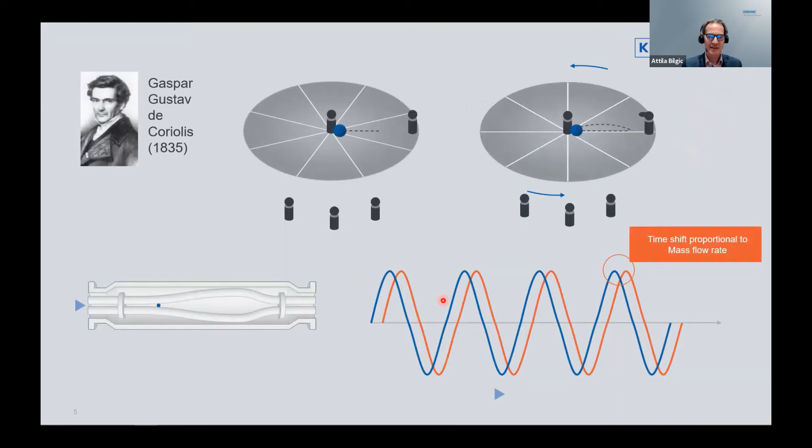Let's look at the Coriolis mass flow meter. It provides very accurate measurements of mass flow and also density, and it can do so quite precisely. It's been known for decades. What we extended is that we made it able to measure entrained gas and compensate for its effect from 0 up to 100%, and that's been since 2012.

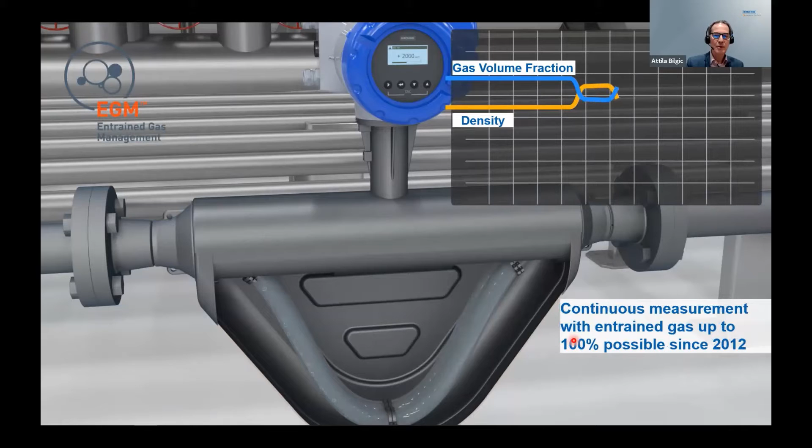So this is the primary data you see when you look at the sensor. But there is a lot more behind it, and you will see it when you look inside. Once again, when you look at the process quantities, you see flow, density, and temperature. But what is actually measured inside the device is a Coriolis time shift, a resonance frequency, and a PT500 resistance. And from those three quantities, you can calculate many other quantities like mass flow, volume flow, density and concentration, or even concentration flow, and of course temperature.

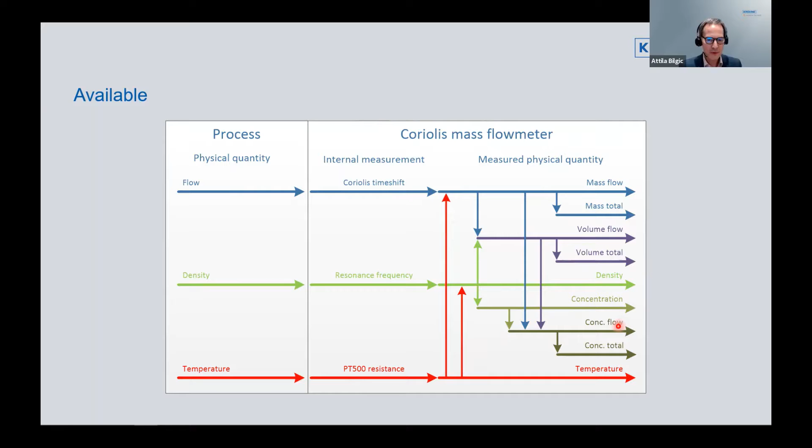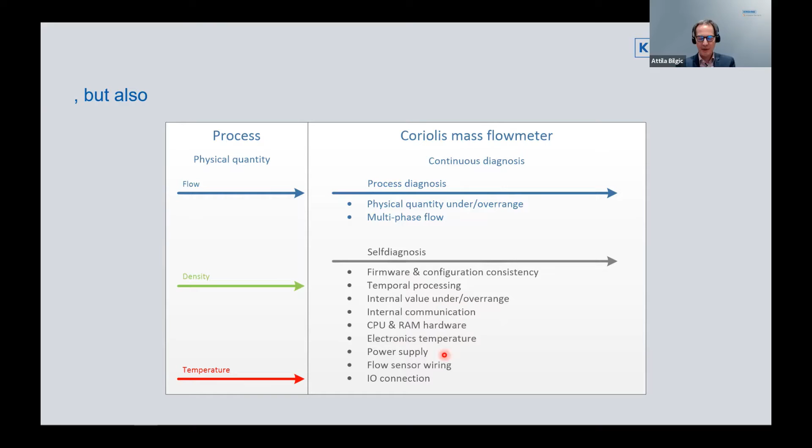Additionally, there is more information in the device. There is process diagnosis available, like physical quantity under or over range, or even multi-phase flow information. And of course, in the electronics, there is a lot of self-diagnosis available, like for temporal processing, internal value under and over range, internal communication, CPU and RAM tests, electronic temperature, and so on. So there is a lot of data, and actually there is a lot of information already available today.

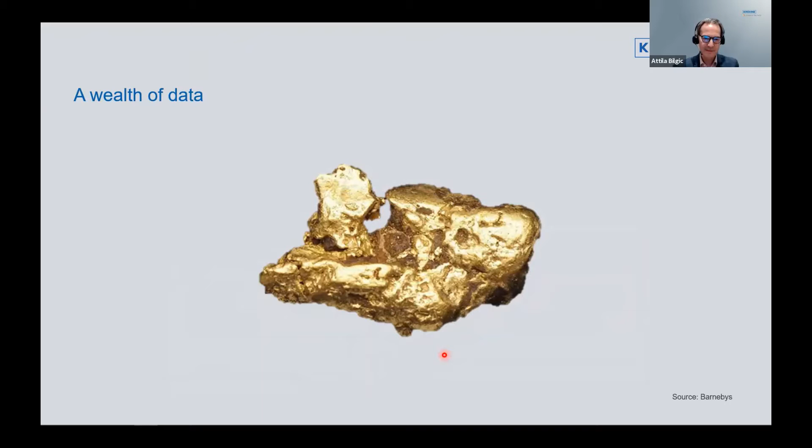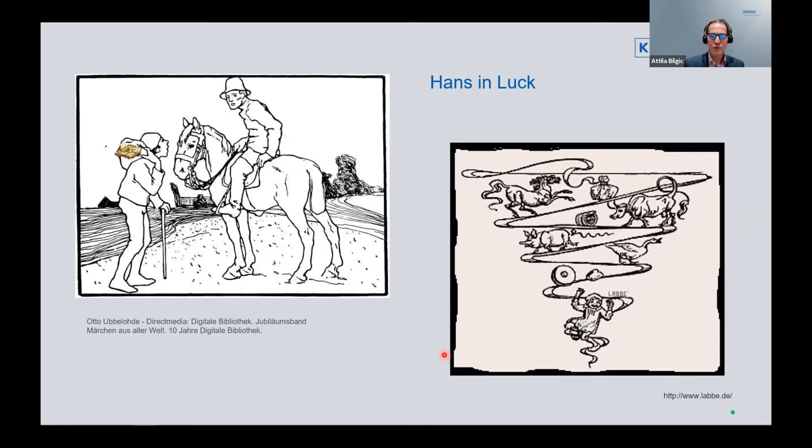Let's look at the next step in our eightfold path. We have a lot of data, but we need right preservation, meaning do not convert your data away. I'll show you this in an illustration from a German fairy tale, Hans in Luck, which you may know. Hans in Luck got a lump of gold, and whenever he meets someone, he exchanges it for something else. Then that something else is again exchanged, and so on, until the value of his lump of gold becomes less and less until he ends up with zero. Sounds like a fairy tale, but that's pretty much what we do today in our installations in the process industry.

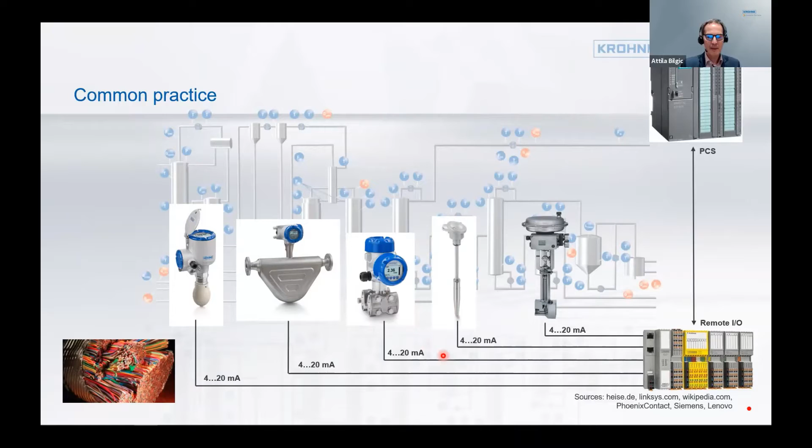Let's look at why. What is common practice today is that we have a lot of equipment already in the field: sensors, measurement technology, actuators. We connect them via a 4 to 20 milliampere loop through a remote I/O with a control system.

Let's more specifically look at a little part of a big plant. Let's look at a control loop. For a control loop, we need a valve to control the flow, and we need a flow meter to measure the flow. The flow meter is indicating the flow, giving the information to the PCS, and then the PCS in turn is controlling the valve to open up more or close more the flow.

Theoretically, it's quite easy, but what's actually happening is the following.

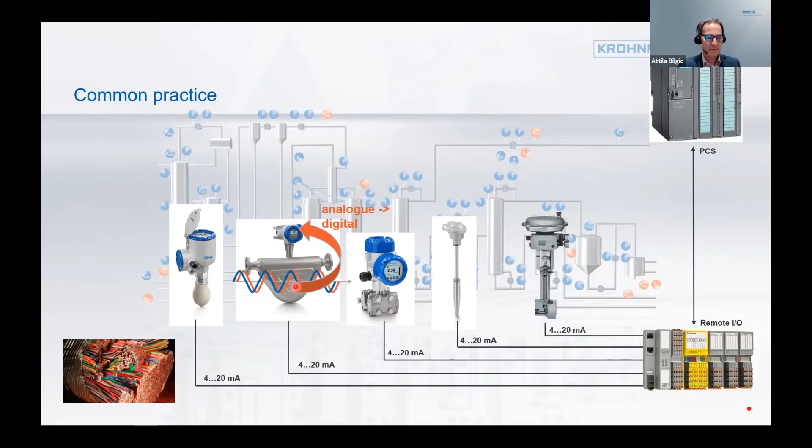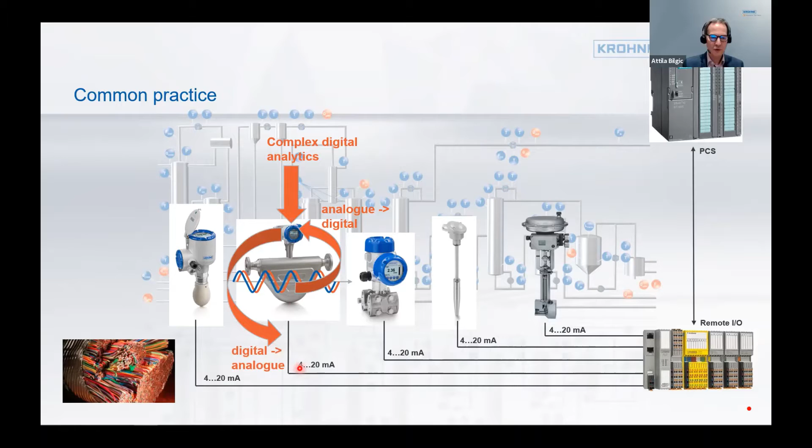In the flow meter, we do an analog to digital conversion from the actual flow primary measurement in the electronics. There we do a lot of complex digital analytics. We'll come to that later. Then we do conversion from digital to analog to transfer the flow measurement value via a 4 to 20 milliamp power loop to the remote I/O.

And this is going through hot and cold areas. You can imagine it has to work somewhere in the North Pole as well as somewhere in the desert.

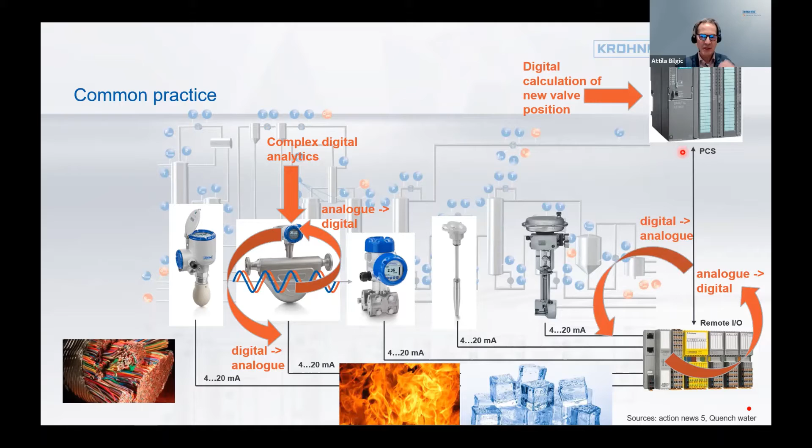Typically in the remote I/O, we do an analog to digital conversion again, and then we transfer the signal to the PCS. There, some digital calculation is done of a new valve position in our example. Then it is again converted from a digital signal to an analog signal, transferred back via a power loop. And then in the valve electronics, the analog signal is again digitalized and used for some digital processing. A new adjustment value for the valve positioner is calculated, converted into an analog signal, and transferred to the positioner. That's quite a lot of conversions.

But I have another example to show it more in a simplified way.

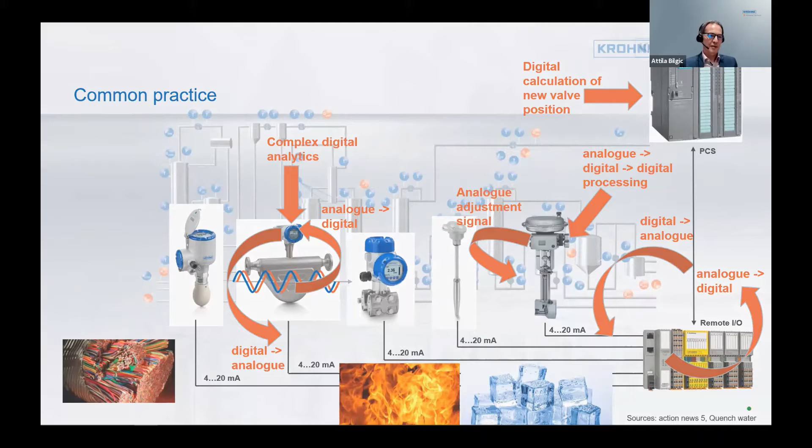If you're a hobby photographer and you have a digital camera and you want to send one of your pictures to your friends or family, this example will show how you usually should not do it. You take the picture with your digital camera, you print it on your printer, take the print, move on to your scanner, put it in the scanner, digitalize it again, scan it, bring it to your PC, and then send it via email. I think that really sounds weird, and probably none of us would ever do it that way, but that's, in a simplified way, what we actually still do in the process industry.

And I think there's really room for improvement.

Another example to illustrate what we actually do versus the possibilities we have, or how we underuse it, was presented by Dr. Brucker in one of the NAMUR general meetings, I think in 2014. He made a very nice presentation on the accuracy of flow meters and the reality check. I don't want to repeat everything, but I just want to focus on the main aspects.

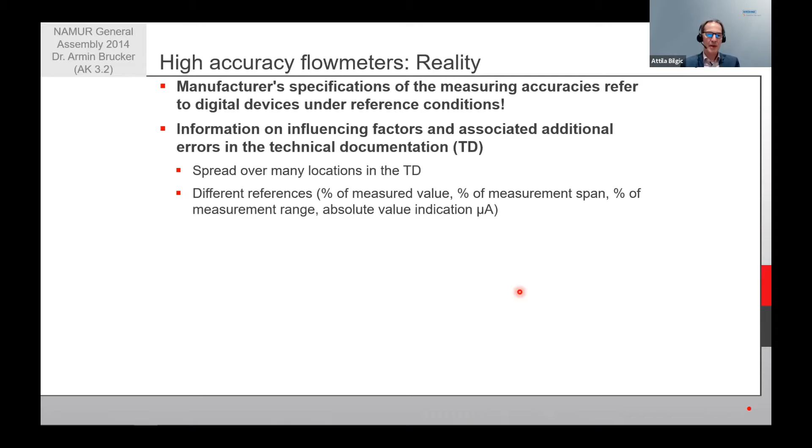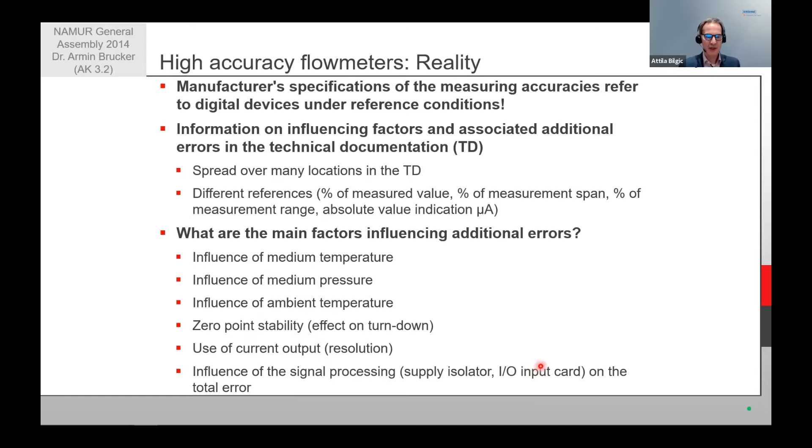We as manufacturers specify measuring accuracies under certain conditions, and this information is spread in the technical documentation. But what are the main factors influencing the additional errors? This is actually the influence of medium temperature, medium pressure, ambient temperature, the zero-point stability, the use of the current output, and the influence of signal processing, the supply, isolator, I/O input cards, and so on.

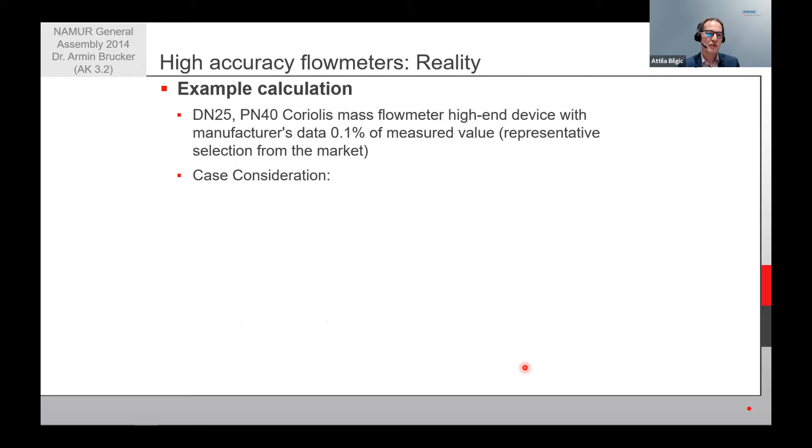He looked at two simple examples. He took a Coriolis mass flow meter, a typical high-end device, specified at 0.1% accuracy. We consider two cases. Case one is under normal medium pressure and at 50% of the measurement range, a turn down ratio of 1 to 2, so we use the scale quite nicely. The other example is with 10% of measurement range, a turn down ratio of 1 to 10, meaning we're going quite to the beginning of the measurement range.

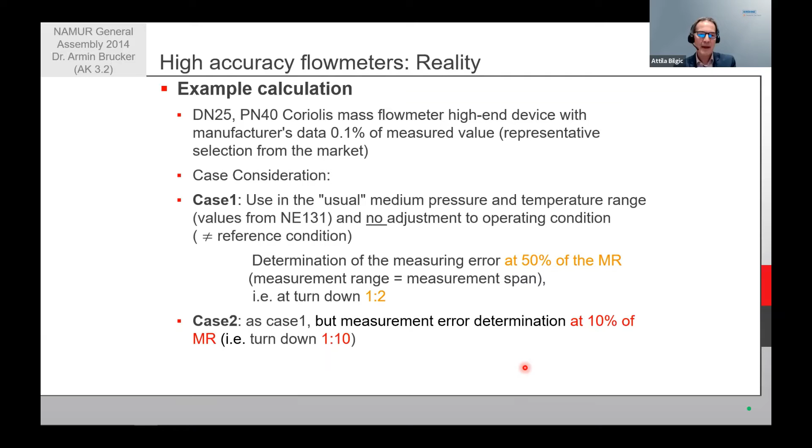Let's only look at the error contribution in such a case. This is the actual sensor error under these boundary conditions, and we see the major impact on sensor error is the ambient temperature, dominating all the other errors. But next to the actual sensor error, there is an error contribution from power supply, and another significant error contribution from the analog input to the PCS. So the total error in that case would amount to 0.55%. Remember, the specified accuracy was 0.1%.

When you look at the second case, turn down ratio 1 to 10, again going to the lower end of the measurement range, you see that the ambient temperature contributes even more to the sensor error, amounting to almost 2%. The power supply and also analog input give major contributions to a total error bigger than 2.5%.

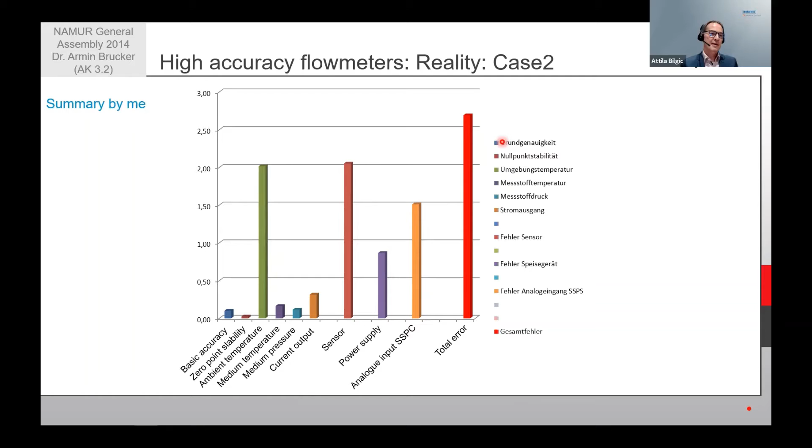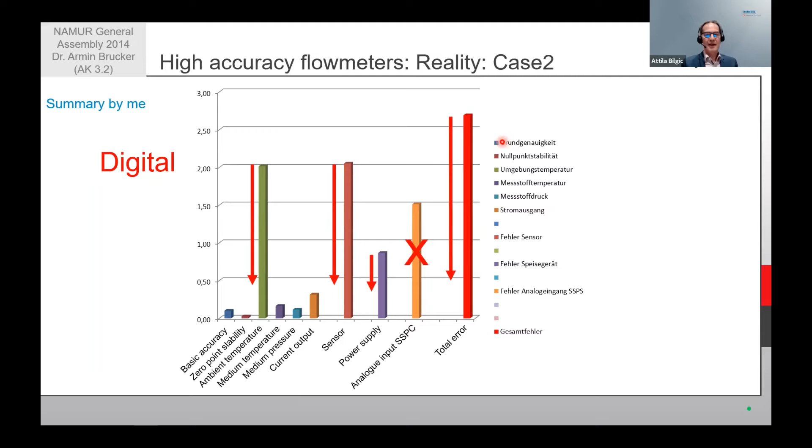The next point is looking to the right connection, and for that we have to use suitable technologies.

Some of us might remember the good old times of the telephone system. When you wanted to call someone, especially overseas, there was an operator sitting somewhere physically connecting the caller and the receiver, establishing a physical connection between two parties. A physical connection doesn't have to be a wire, it can also be a radio transmission, but the important point is it's a one-to-one connection. That's why this is called circuit switched communication. It was quite stable and reliable once set up, but also very inflexible, relying on a stable connection, wired or wireless, between the two parties.

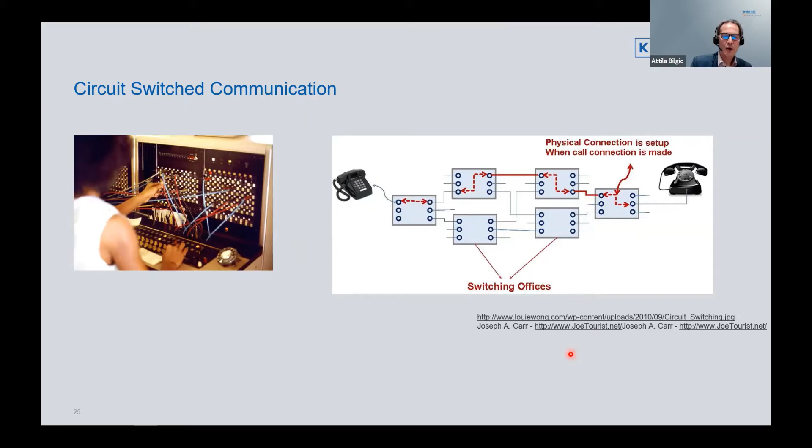That's definitely not what we do nowadays, and it's not how computer networks work. Computer networks actually work in a packet switched communication setup, where a sender sends packages. Packages can be routed through different ways and will be recombined at the recipient again. Such a communication network is much more reliable, has redundancy, and has much higher flexibility. That's a typical setup for modern computer networks, whether it's the internet itself or a subnet.

Let's look at what we do today in the process industry. Again, this is the setup we've already discussed. We connect all our equipment through an analog 4 to 20 milliamp current loop to a remote I/O and then finally to a control system.

But revolutionarily, we were able to modulate a digital signal on this, and this is what we call HART communication. Besides its low speed, HART communication is actually exactly the setup I've shown before. It's a circuit switched communication with all the advantages and disadvantages such a system brings: point-to-point connectivity, no connectivity between assets, and a static communication setup.

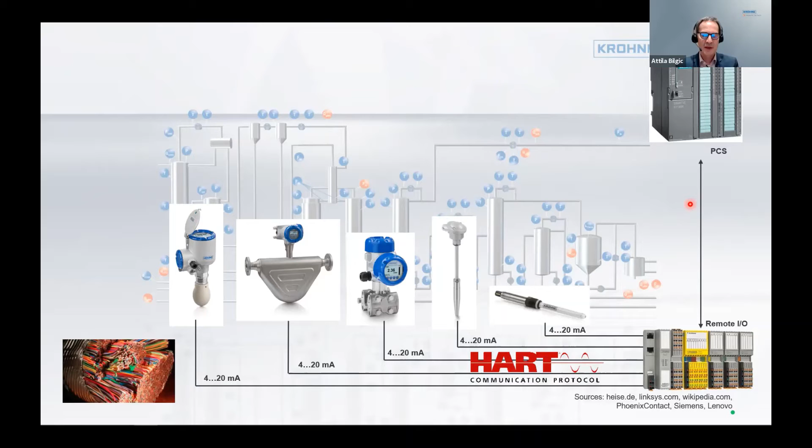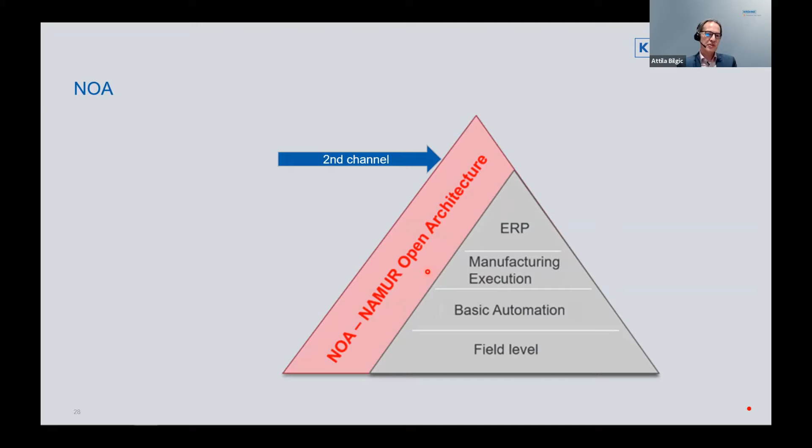So looking at that, NAMUR came up with the idea to extend that system, and that's what they called NOA, the NAMUR Open Architecture, which provides a second communication channel. Why that? Because this old-fashioned, established, but robust communication architecture of the past should still persist and be carried on into the future to keep all the advantages it brings. But with a second channel, we open up a completely new communication world with all the possibilities it brings, though we have to do it in a safe and secure manner.

Now there are two ways to build such a second channel. One way is a kind of physical separation of your communication channels, the first and the second channel, and the other is a logical separation, meaning the same physical channel but separated by content on the logical level. I will give you an example of what that means for us in the process industry.

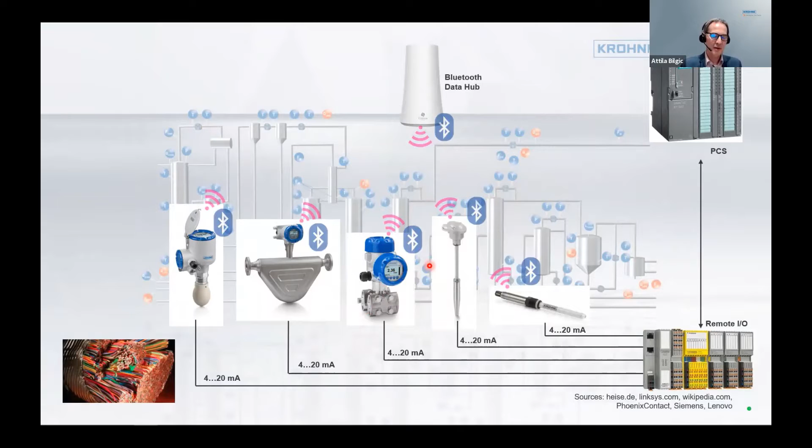A simple way to extend the architecture we've seen with a physical second channel is, for example, Bluetooth. Bluetooth is just an example of wireless technology, it could also be wireless LAN or another technology. The advantage is that you can use the existing infrastructure and add wireless connectivity, needing hubs to collect the information. As you can clearly see, there is no physical connection between a control system, which still runs in the old-fashioned way, and the new world of big data and open communication, where you can enhance a lot of features that are completely impossible in our closed world. That's an easy one, theoretically.

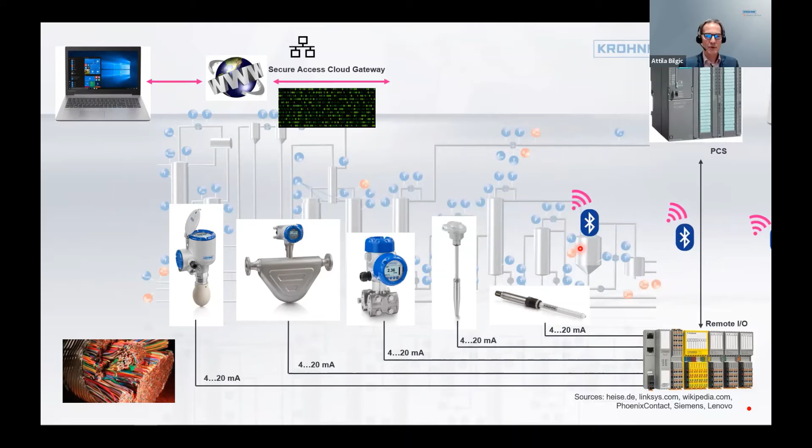Another approach is the logical separation. We remove the Bluetooth connectivity again and connect our equipment with Ethernet. In that way, all the equipment in the field can go through a splitter, which decides what is critical for the control functionality. That information goes to the PCS, and all the other additional information and data we already have in the field goes to a cloud or on-premise solution. We'll come to that a little bit later.

After looking at the right connection, you also need to look at the right protection, because it's nice to extend our world with all the open features, with all the big data approaches and artificial intelligence approaches which are already in the world, but definitely we do not want to sacrifice operation safety. That's a must-have.

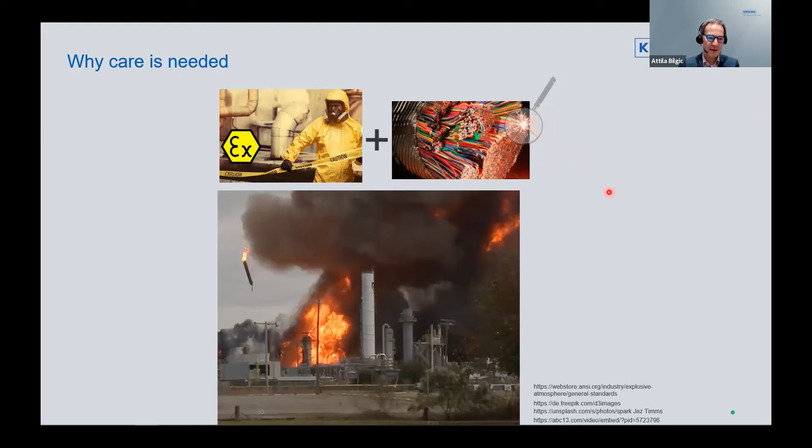As you all are aware, we have Ex zones, explosion protection zones. When we put in a lot of cabling, especially with high energy, and something nasty happens, it results in unnice pictures, unnice situations that we all want to avoid. So the nice connectivity with Ethernet, which brings a lot of possibilities to the field, also has to be suitable to work in an explosion protected area.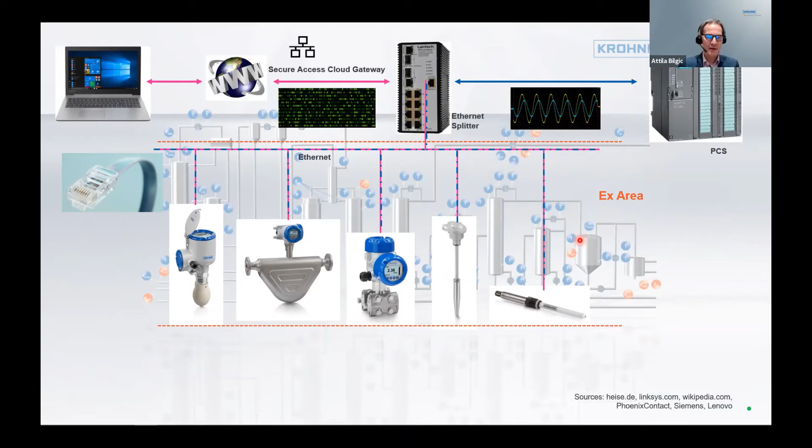To do so, we have to limit the energy we use for the signal transmission in the Ethernet network. That's easy said, but quite difficult to be done, because we need energy for digital signal transmission.

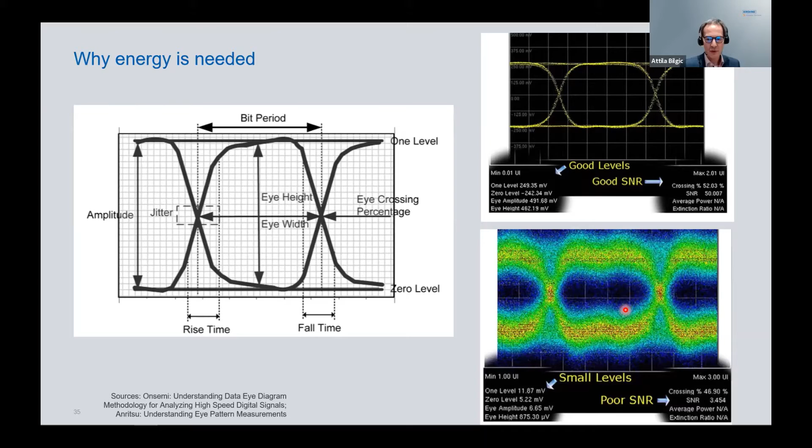This increases significantly the so-called bit error rate, and makes digital signal transmission difficult or close to impossible. Because on the other side, you have to consider that you have to bridge large distances. You need long cables, because our plants are not just fitting on a table.

And that's why an industry consortium thought about how to extend this Ethernet standard. They came up with the so-called Advanced Physical Layer, APL. The mission is to find an extension to the Ethernet standard 802.3 CG, which is fully compatible for all the higher layers, just changing something little in the physical layer. We'll come to that overview on the next slide.

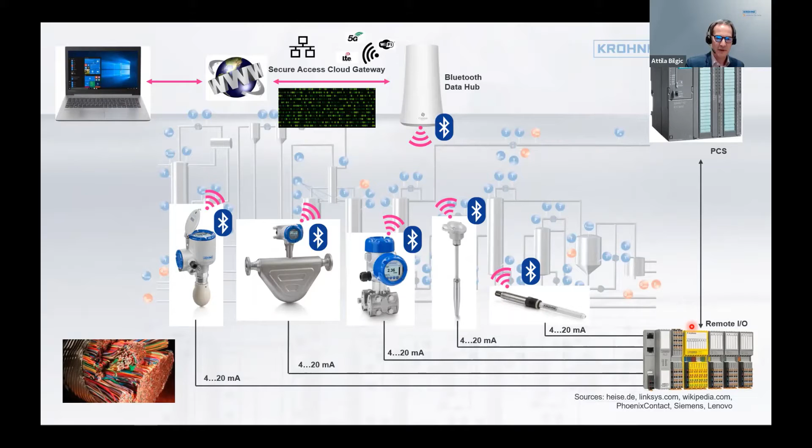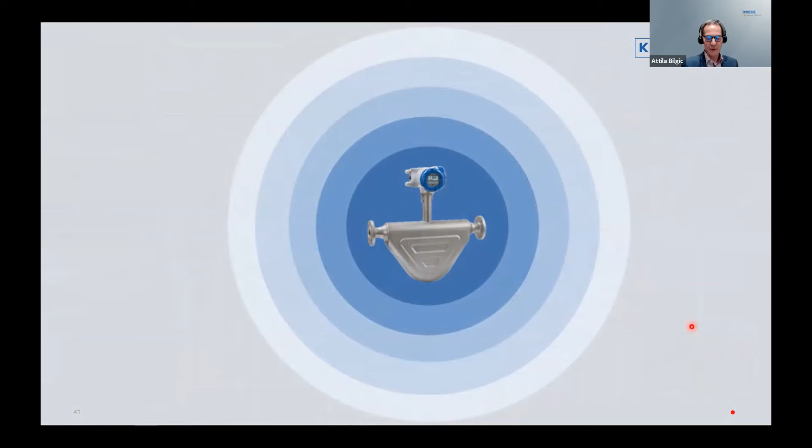Coming back to the two ways, physical and logical separation, for the second channel to implement the NOA architecture, there is another aspect: security and safety, especially when it comes to wireless connectivity. That's why we thought about a structure and architecture for how to make a SIL-compliant Coriolis mass flow meter suitable for communication with Bluetooth connectivity. One aspect is you have to take care for safety, and at the same time you have to take care for security. They sound similar, but they are quite different.

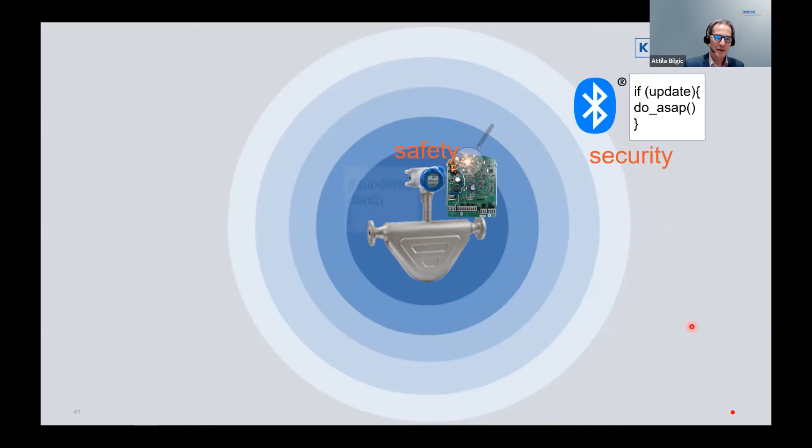There is a simple example. For security, you would immediately want to do an update as soon as one is available. That's what you know from your mobile phones, tablets, and laptops, where the system asks you to immediately install an update, if you didn't already allow it to do so automatically. But this is quite the opposite for safety. Your safety core system shouldn't be updated. So if an update were available, you should step back and say, hold on a moment, I'm not going to change my certified software in my safety system. So how to manage that is quite a challenging task.

The only way we came up with to solve it is this ring structure, or shell structure, with different security layers. The outer layer is an insecure area with no trust and no authentication — here you connect mobile devices. Then you have the outer secure area with partial trust, and the inner secure area, which is the safety redundant area, under full trust. In between there is a firewall, and we even built in a hardware switch. This hardware switch can completely shut off any wireless communication, or bring the system to read-only mode, or even to read and write mode. With that, we were able to get a certified security and safety compliant system for the process industry.

So after we protected our system correctly, we have to think about the context into which we put our data and information, to finally make information knowledge for the people in the field. And to do so, we have to prepare what our experts need.

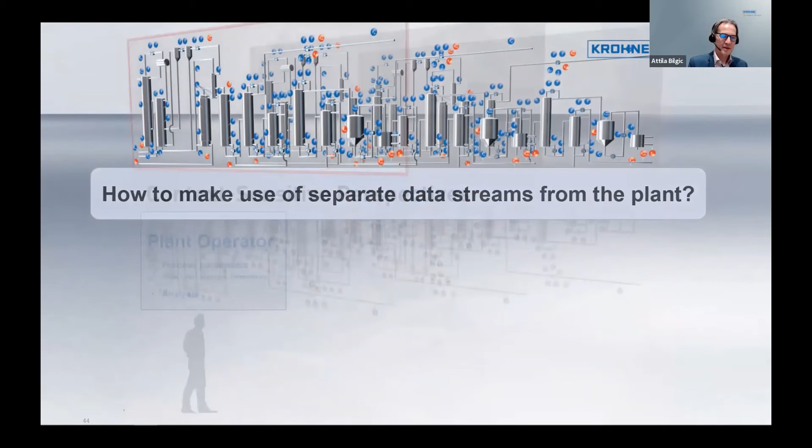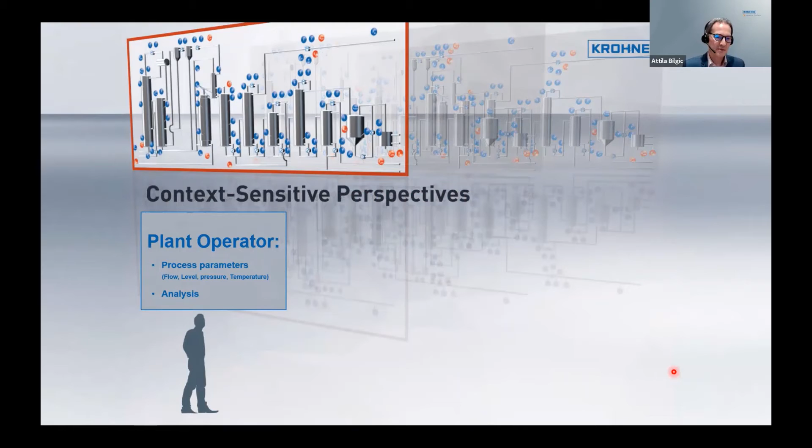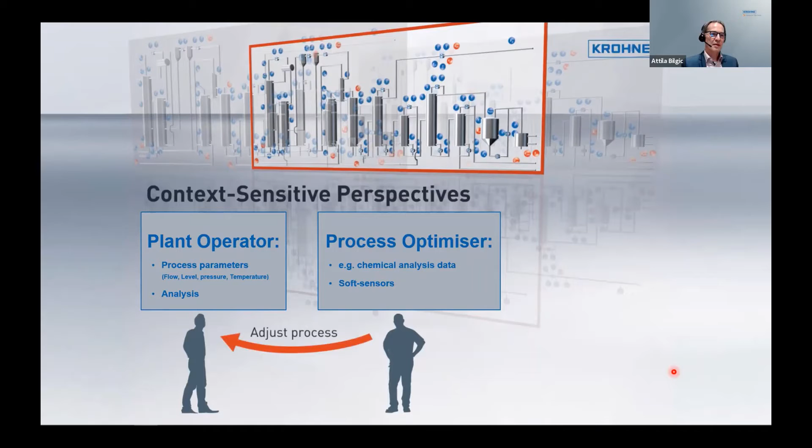Let me start with a simple example that shows, in a very simple and superficial way, how to make use of separate data streams from plants. A plant operator still wants primary measurement values — what we call flow, level, temperature, pressure, and chemical analytics. A process optimizer might look at different data, like chemical analysis or information from soft sensors. And the asset manager might look at device or plant diagnostic data, to also give feedback to the plant operator in terms of predictive maintenance information.

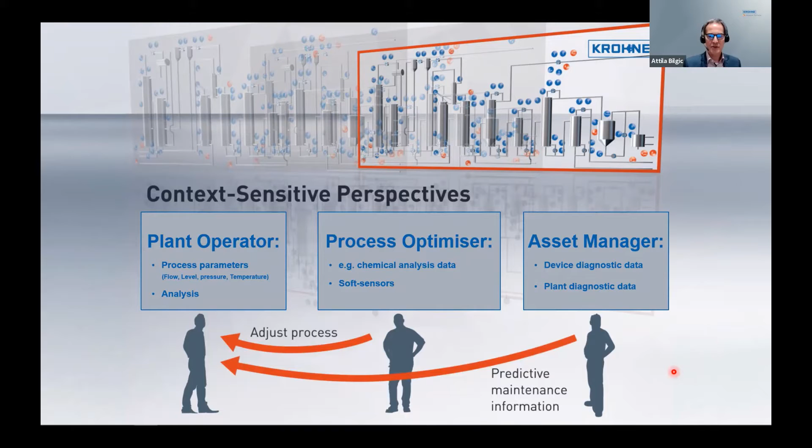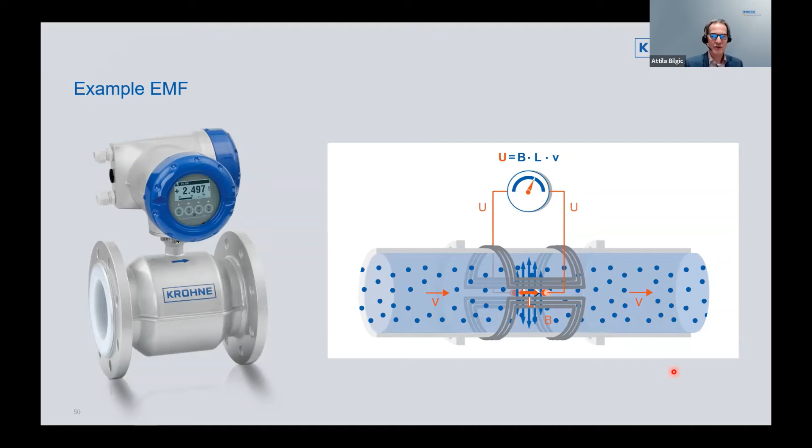Sounds quite simple, but it's not that easy to realize in practice. Again, I want to look at a simple example from a flow meter — the electromagnetic flow meter. We don't have to go into detail on how it works, but I will quickly illustrate it. The context of the plant operator is: how can I get reliable process control data? He wants a stable, reliable flow value from this instrument in the field.

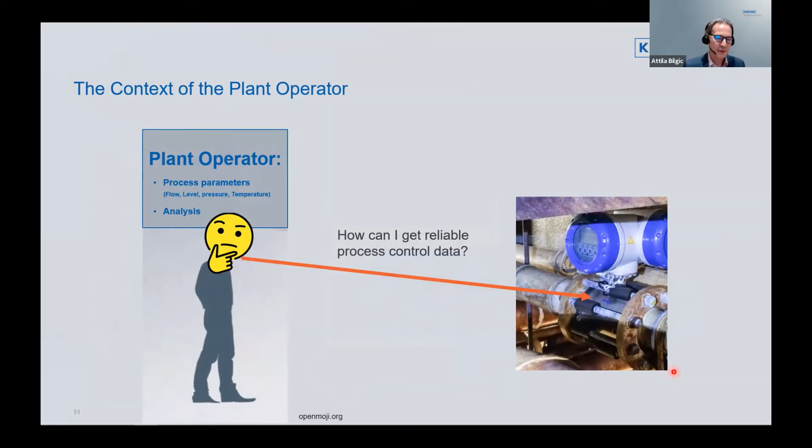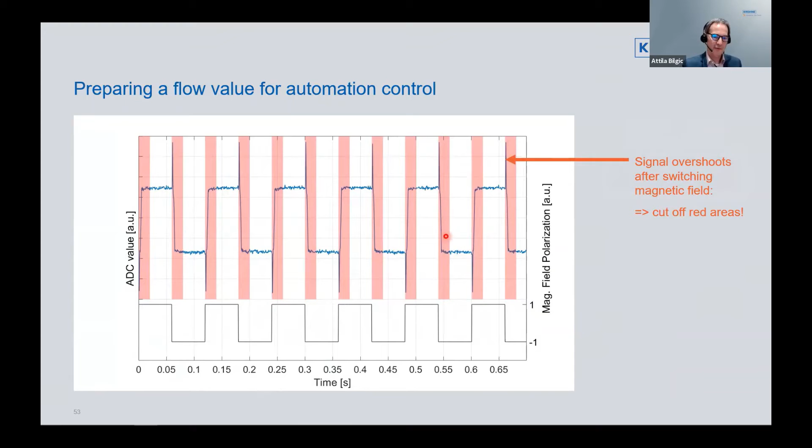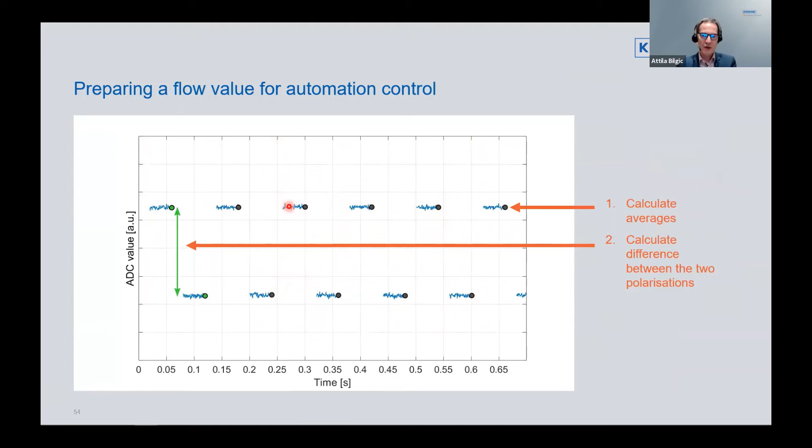To do so, we at KROHNE, as well as other competitors in the market, put quite some effort into the device to stabilize the signal. This, for example, would be a typical signal at the electrodes of the equipment, or at the ADC of the electronics, in a typical flow situation. We switch the magnetic field periodically to cancel out asymmetries, and we have signal overshoots due to the switching magnetic field, which we have to eliminate. Then we end up with more or less stabilized signals, leading to a stabilized flow signal, which again goes through a filter. Here we've taken a finite impulse response filter, a FIR filter, which flattens out the signal variations over time and leads to a stabilized flow signal.

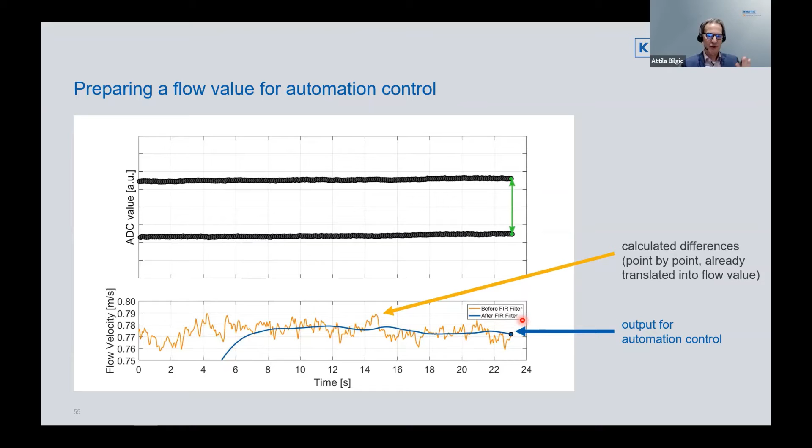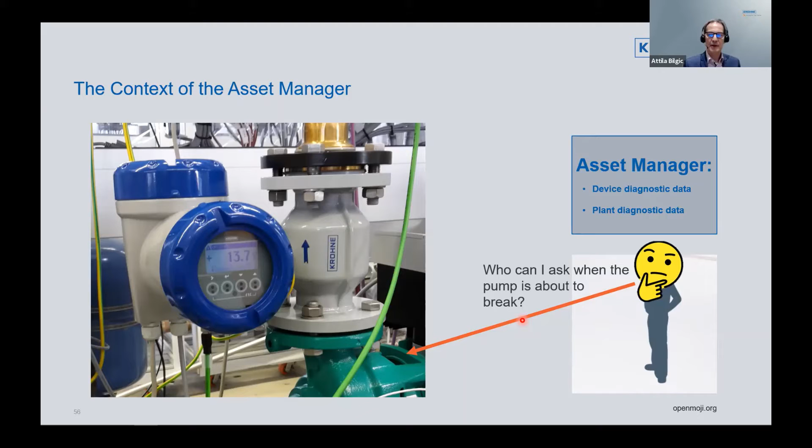So we're happy we got a stabilized flow signal. So far so good. The asset manager might now ask a different question — who can I ask when the pump is about to break? For sure, you can take diagnostic information directly from a smart pump, but eventually your purchase department made savings on the budget, so you're not allowed to buy a smart pump and you have a simple unregulated pump instead. But your flow meter can still tell you something about the pump. You just do something different.

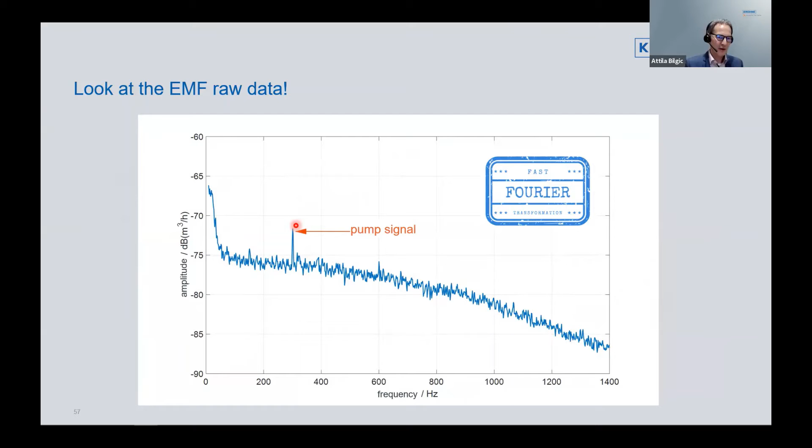You don't cut away all the information, as I just showed, in order to stabilize the flow signal. Instead, you do a fast Fourier transform of the time-dependent signal, and in your spectrum you suddenly find the pump signal — which tells you quite a lot about how the pump is feeling. Doing this is a different topic, but here I just wanted to show that even in the spectrum of an electromagnetic flow meter, you can see information about other assets in the plant.

So you have to prepare what your experts need.

The next topic is right modesty. Right modesty means we as humans have to accept when machines can do things better.

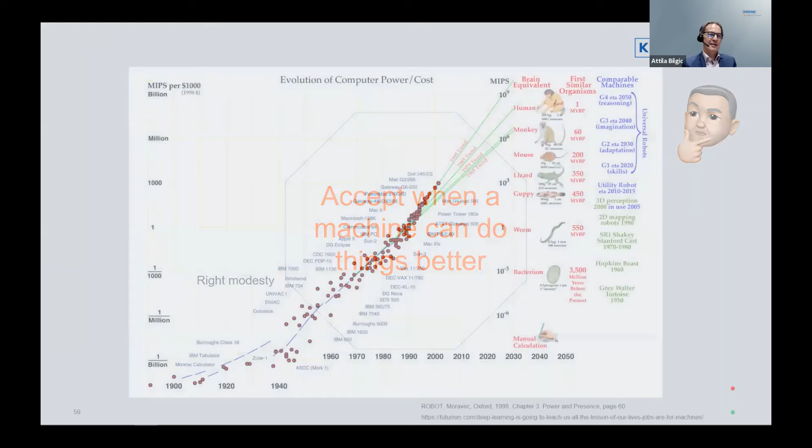I love this example, I've used it many times. It's actually quite old, but it's still valid. It shows the development of computing power per $1,000, because we have to do cost normalizations. Sometimes we also do power normalizations, but here we focus more on the cost. This is obviously a logarithmic scale, and this is a linear scale. So that means this straight line is exponential growth.

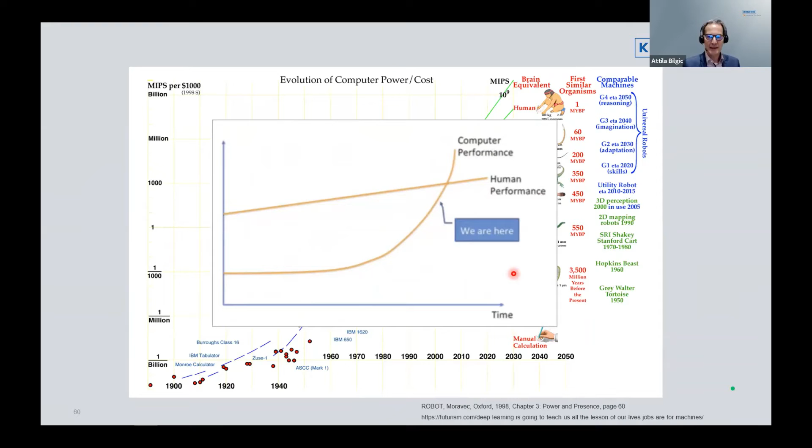There are many examples of computing machines here over time. I'll pick up that slide again later. Where we are today on that line of growing computer performance versus human performance, we're about here. So we are close to a crossover when computer performance can outperform us. Of course this is not valid for everything, but it's valid for quite some things, and for what it is valid will be shown on that slide.

I've taken that picture from Max Tegmark, where he tried to sketch where artificial intelligence already outperformed human intelligence. In what area did it already happen? So it means what is underwater is already taken by AI, and what is still above water or high in a mountain is quite far for AI.

For example, driving is about to be conquered by AI. Go is already conquered. Arithmetic, chess, this is all in jeopardy. Even investments - there are quite some interesting tools now available which do very clever and high performance investment, probably much better than many human investors could think about. But there are also still some other things like cinematography or art, which is still out of reach for AI. And also science is up here right on the mountain, so good for all the scientists among us.

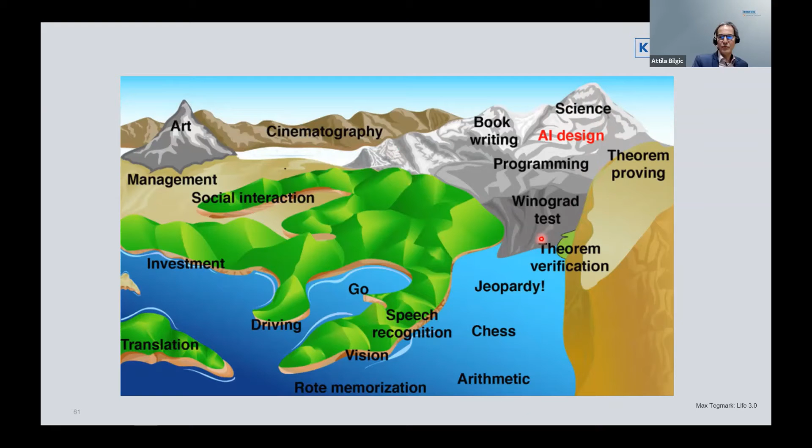So the big question is, can we use such intelligent algorithms also for other things, detecting complex situations? And of course we can.

When you look at the time-dependent signal, you see at the pickup, yeah, you would see such a line. Actually you don't see anything, but again you can do a fast Fourier transform, and you happily see, oh, there was one big peak in the frequency. Yes, that's your vortex frequency. That's what is used today to measure the volume flow, the flow speed through the pipe, and thus you calculate, by knowing the pipe diameter, the volume flow. Quite nice. So you take exactly that point, the maximum in the spectrum, and then you remove all the other information. That is the basic principle of how a vortex flow meter works today.

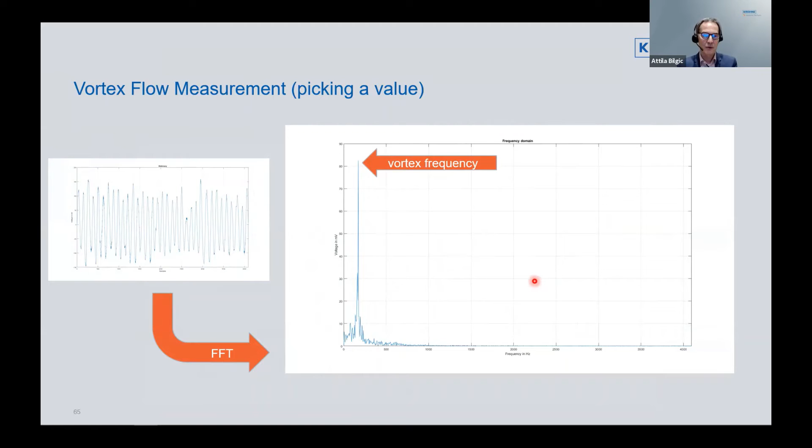But how does the situation look in a more complex situation? A more complex case could be, for example, again a two-phase flow situation. This is a standard diagram to classify two-phase flows. You see the superficial liquid velocity over the superficial gas velocity. Then you have flow regimes like finely dispersed bubble, slug flow, bubble flow, churn, and annular flow. Some of those flow regimes are shown here - these are real life pictures.

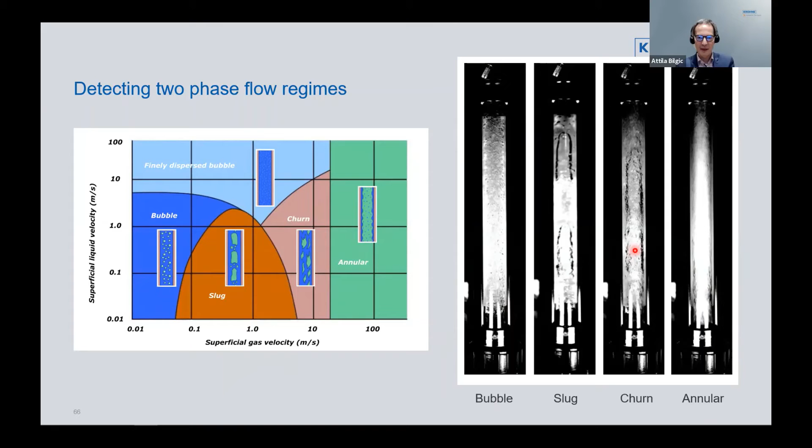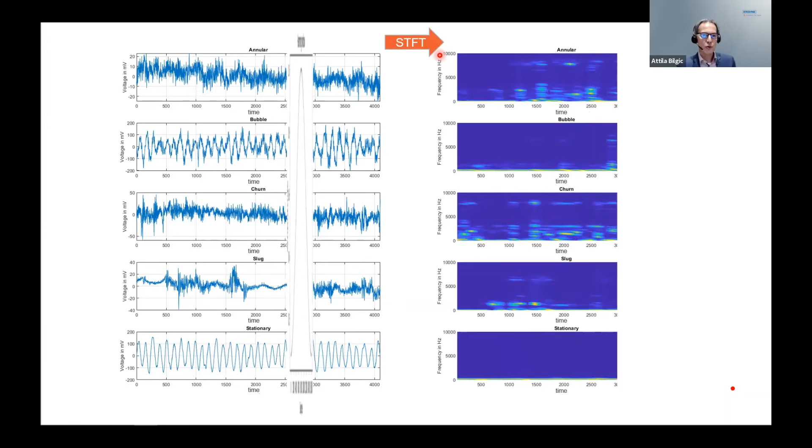Again, when we look at the time-dependent signal of the vortex flow meter for the different flow regimes, you see such nice timelines. What we can do here is a so-called STFT, a short-time Fourier transform, which makes a time-dependent spectrum of this time-dependent signal. So what you see here is the frequency, the color gives the amplitude, so you see a spectrum at a certain point in time, and how the spectrum is changing over time. But what you see here is, in the end, for an artificial intelligence or machine learning system, just a picture. And with proper training, which we already did, the machine learning system is able to identify the flow regime just by such a picture with a confidence of more than 96%.

And that is already quite some more insight. Again, there is no additional instrumentation. There is nothing else done, just taking the raw data as it is available, but processing it in a different way.

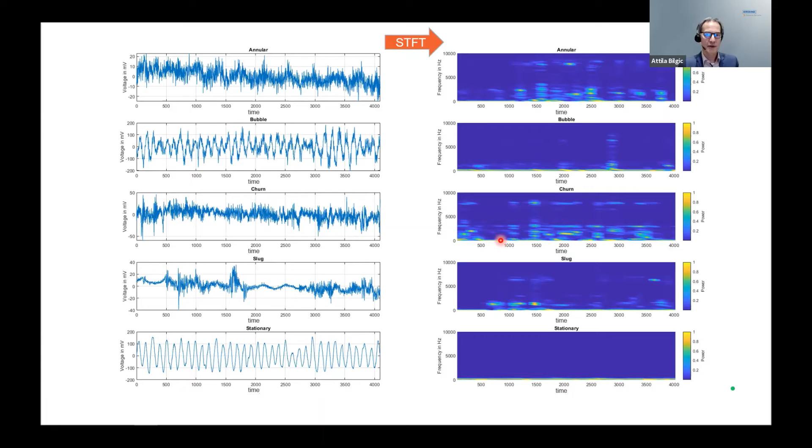And of course, that can be very useful for process optimizers. We can finally say, okay, I got a deeper insight into my process.

What I've shown here is, of course, just a simple example. You should really imagine that such things can be done for much more complicated and complex chemical analysis data and so-called soft sensors. There are already quite some studies available and ongoing that, with a proper combination of simple sensors and simple information, especially on the base of raw data, in combination with a well-trained artificial intelligence algorithm, you may even be able to not completely replace a chemical analysis, but to give, at least for a certain time span into the future, a prediction of the chemical composition of your product in the system.

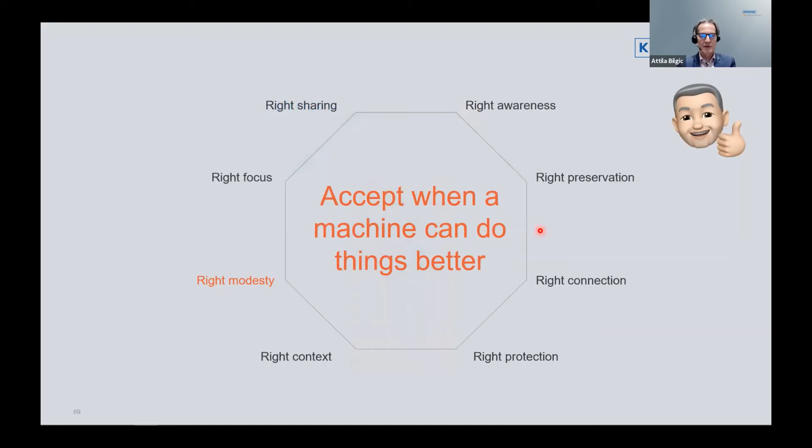So after we accepted the right modesty, we need the right focus.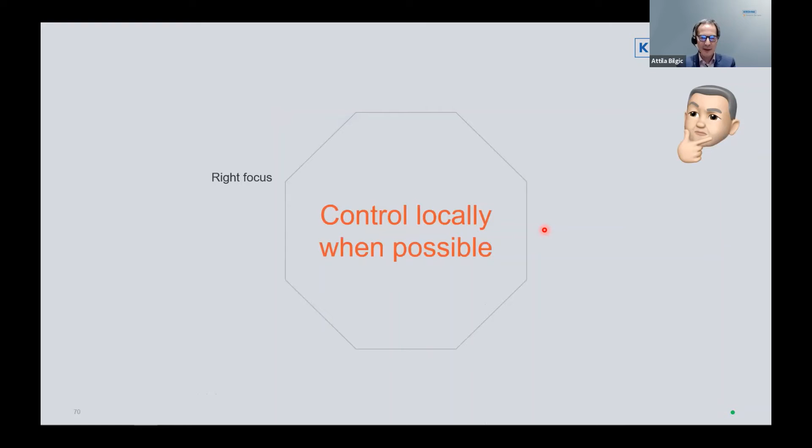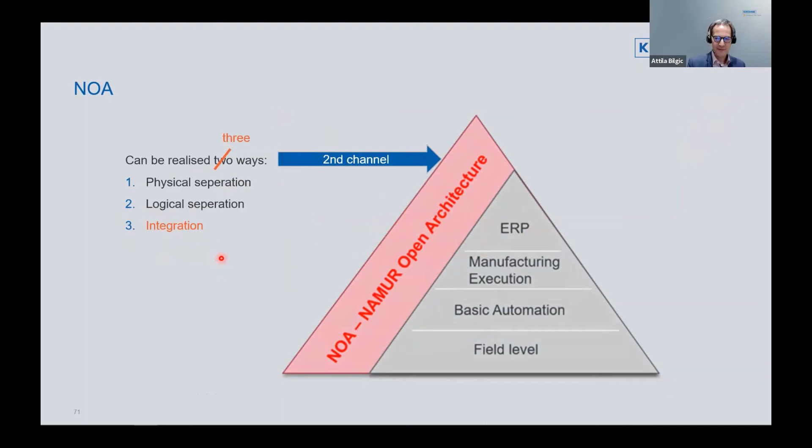And actually, I have to extend now a little bit what I just said 15 minutes before. For the second channel, there is also a third option. It is not only the physical separation or the logical separation of the second channel, there is also integration. And what I mean by this is shown here. So what KROHNE did together with Samson as a valve manufacturer, we started to create an integration of sensors and actuators in one device in the field. And by that, we can cover the production and field level. We also can integrate the control level because this is a self-controlling valve. And we can also give information for the supervision level.

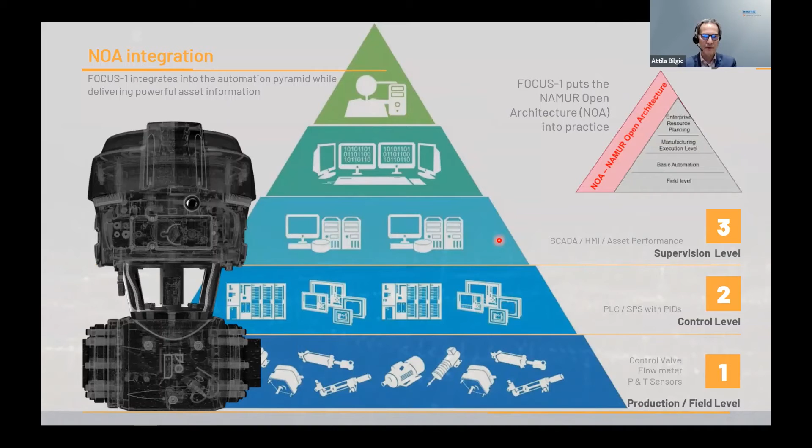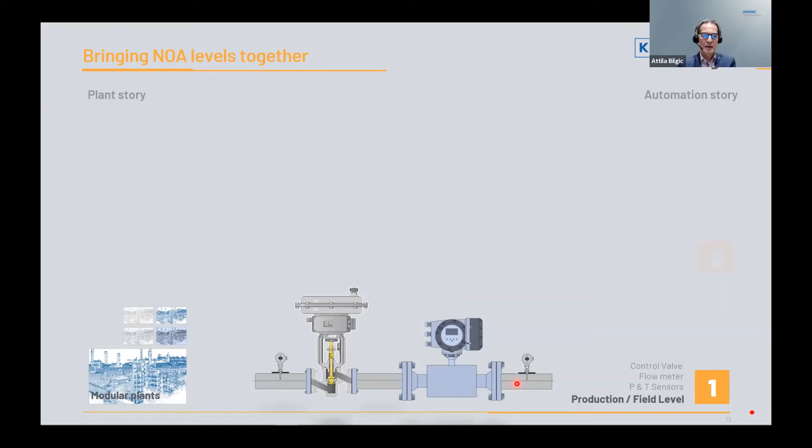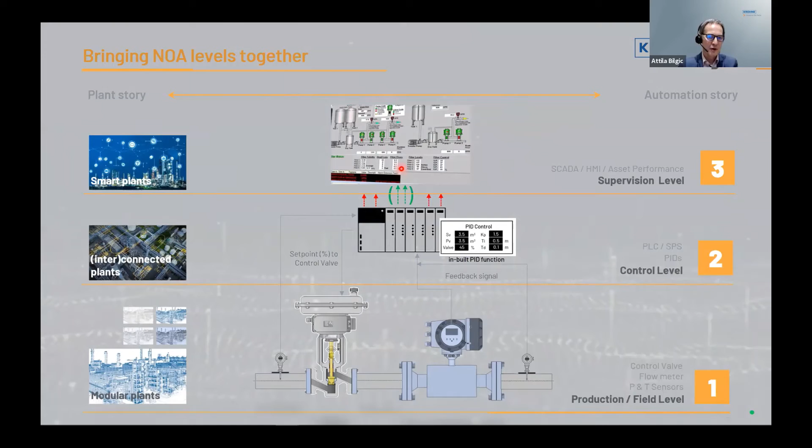We integrated here a valve, a flow meter, and two pressure sensors and actually also a temperature sensor, not shown here. We also integrated the control level because the FOCUS-1 device includes a powerful embedded computer, which is able to do local control. And with the integrated sensors and some additional AI algorithms, we're able to give also information on the supervision level, which is far beyond only the local control information.

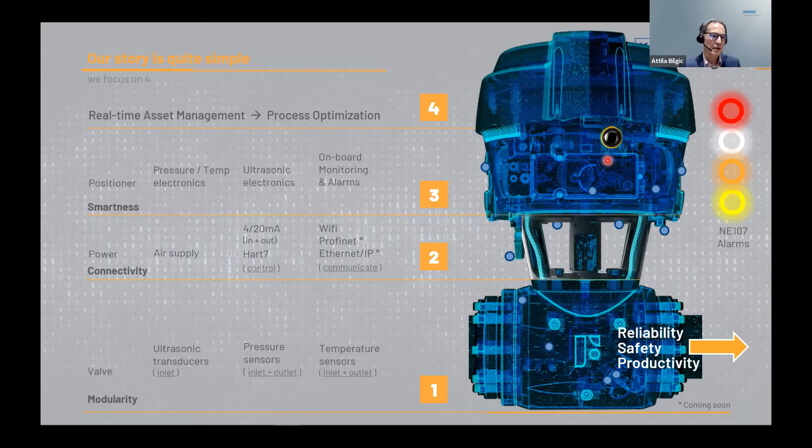Putting that together, we end up with an integrated, almost a kind of small module. It's a localized autonomous control element which can adjust autonomously the flow at the one point of installation, and which can provide a lot of additional diagnostic information.

But local control is nice, but it's not everything. Finally, we also need the right sharing, because we have to distribute our abilities wisely.

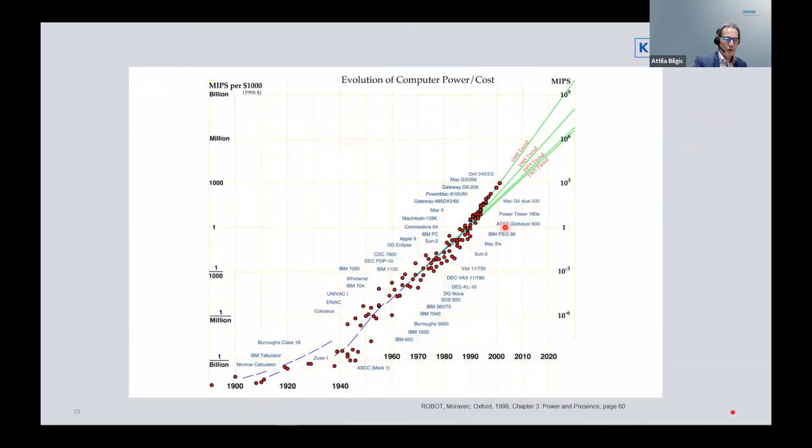And you all remember, probably, the times they are changing, by Bob Dylan. And that brings me back to the slide I've shown before. That's quite old, as I told you, it's from the pre-2000 time-ish, something like that. But I added another dot, and that's the Apple M1 neural engine, but only the neural engine. And that would be somewhere here. So that's quite a nice confirmation that this trend is definitely about to continue.

And that's what we have to incorporate in our considerations, especially when we think about future setups of how a system of field devices, of edge devices, and of cloud connectivity can look like.

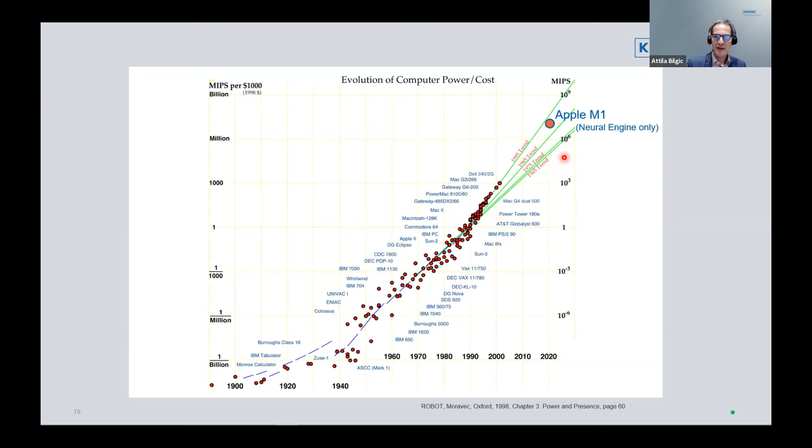Coming back to our reality, we have a lot of equipment in the field. And in the future, they're hopefully connected with a powerful communication backbone, but they can be connected to an edge device, a local system, still a local system. Then we will have a cloud with connectivity probably to other edge devices.

You have certain communication bandwidths, and I'm sure there will be between 10 and 100 megabits. That's already indicated by the APL standard, but also the cloud connectivity will be more or less in the same range concerning the connectivity speed.

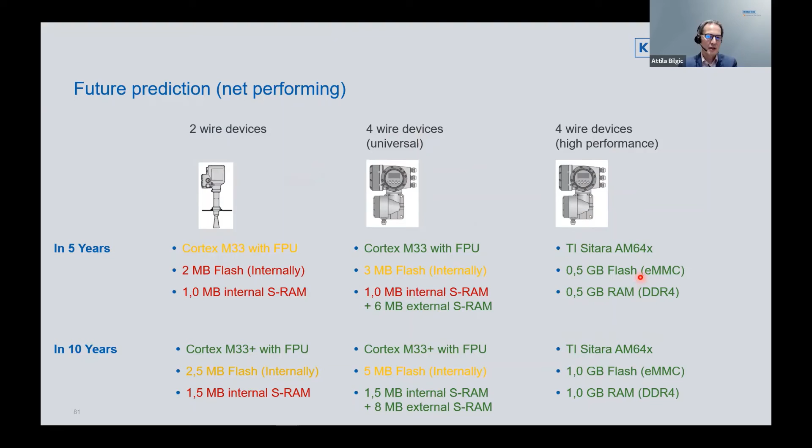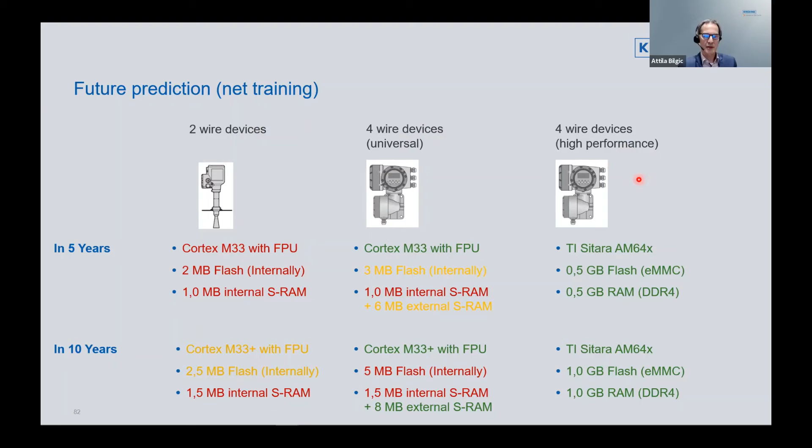When we look at net training, that is the training of neural networks, it even looks worse. You can completely forget to do network training on 2-wire devices now, in 5 years, and most likely not in 10 years. It may be somehow possible to some extent on 4-wire devices, and you are able to do so already today and even more in the future on high-performance 4-wire devices.

Looking at the future prediction for network performing and training on the edge devices and on the cloud computing, there is already today, and even more in the future, no real limitation to do so.

Why do I point to that? Because it gives us a clear indication that relying on 2-wire devices or 2-wire installations will kill future smartness in the field, or in other drastic words, no smart instruments in the field with a typical 2-wire installation. And you have then quite a choice to put artificial intelligence and neural networks into your overall system.

You can do it in the field on 4-wire devices. You can definitely do it on edge, or definitely also in the cloud, depending on many other boundary conditions. But with such considerations, you're already today able to give a top-level prediction of how a future system architecture can look, concerning especially the usage of neural networks on different levels of the hierarchy in our plants.

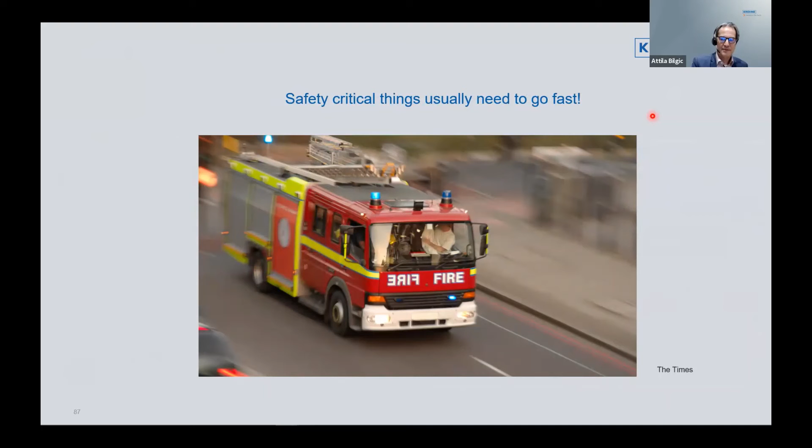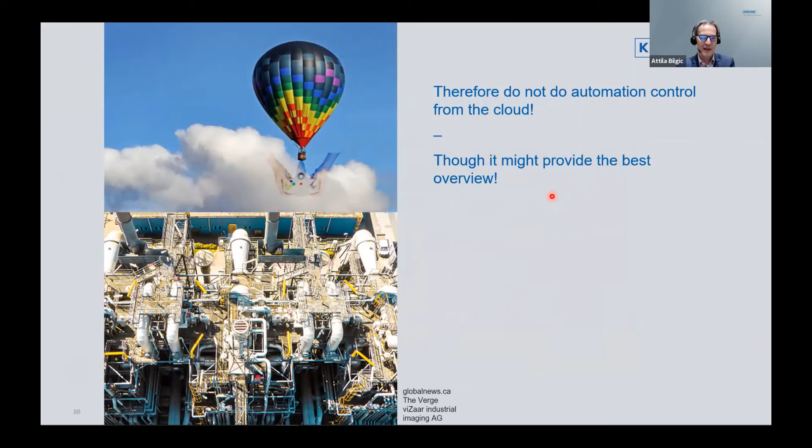Coming back to the story between the 2-wire and 4-wire installations in the field: if you want to be fast, definitely don't take the bus, and safety critical things usually need to go fast. And therefore, do not do automation control from the cloud, though it might provide the best overview. Local systems will look more and more different in the future.

So with that, I can conclude my eight-fold path. I hope I was able to make you join me on the way, and I hope you could also enjoy the way. But I have one thing to admit at the end of my presentation: you know, this Congress is meant to demystify process analytical technology. It's fine for me, but to be honest, I lied about the rainbow in the beginning. It cannot turn numbers, and infinite remains the number of our possibilities. Thank you all for your attention.